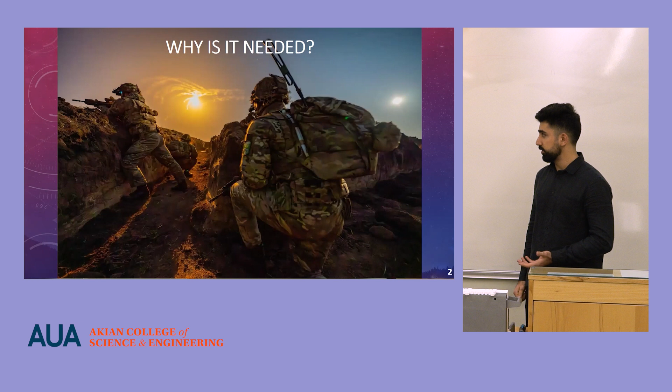There were various ways of magazine refilling, for example by hand, which takes lots of time and effort, and also it is not protected from dirt and dust—lots of things can get into it—and you have to carry the ammunition or have it stored somewhere.

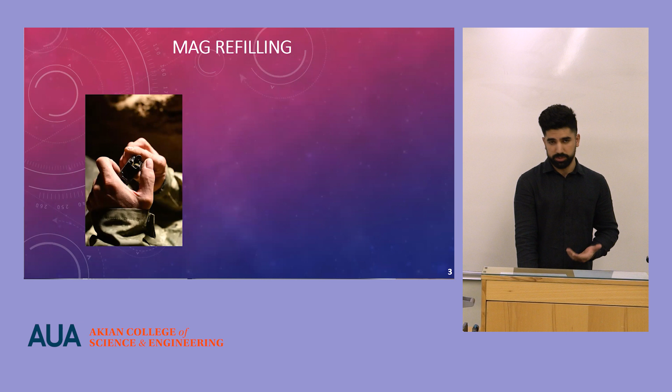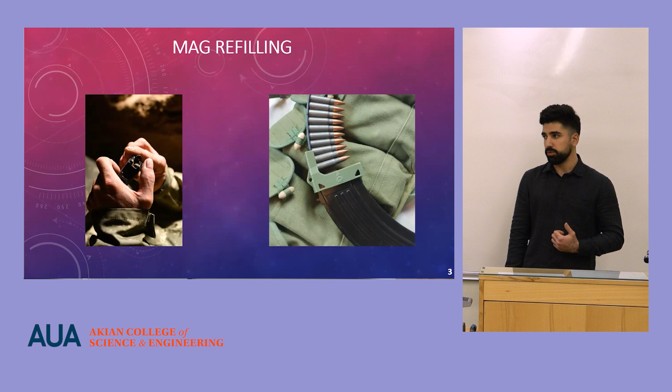The other one is using a clip which can be attached to the magazine. It only loads 10 rounds at a time and also is not protected from anything. Also, you have to carry the clips on you or have them stored somewhere else too.

Other loaders are like this one, which can only load one bullet at a time, also with no bullet carrying or concealment. And this one, in which you have to line up all the bullets in a specific way and then push them into the magazine.

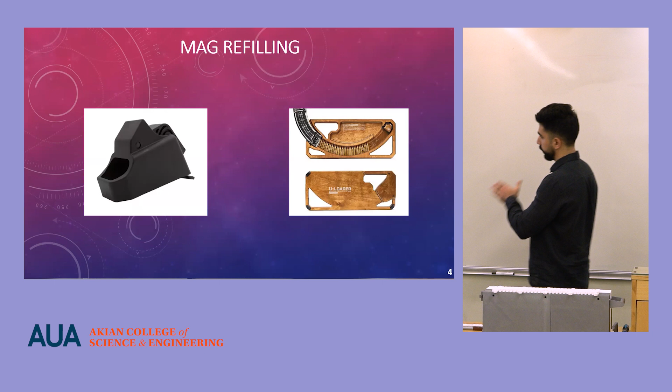In this case, the bullets can be put in any direction that you want, and by turning the handle they will be fed into the magazine, but only one bullet at a time.

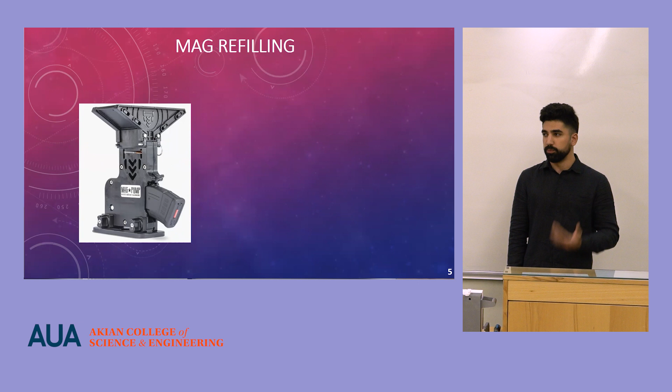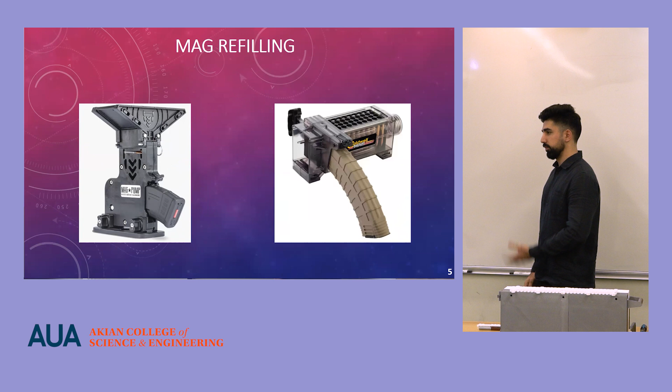The other one feeds 5 bullets into the magazine per push, but you have to really count it to not miscalculate. Also, it's not protected from dirt, dust, grease, water, and everything else.

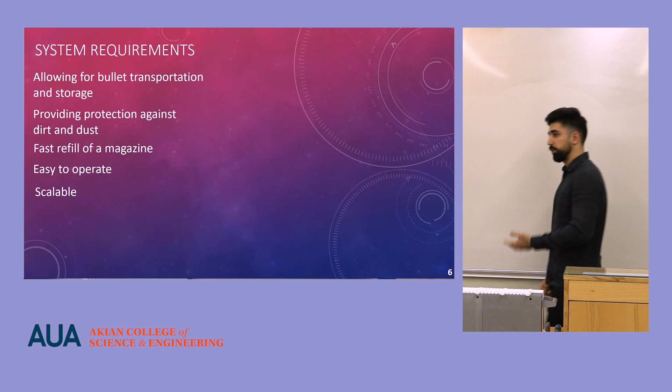That's why I came up with some system requirements for the system I have built: allowing for bullet transportation and storage, providing protection against dirt and dust, fast refill of a magazine, ease of operation so soldiers do not have to undergo heavy training to use the equipment, and scalability of the whole project.

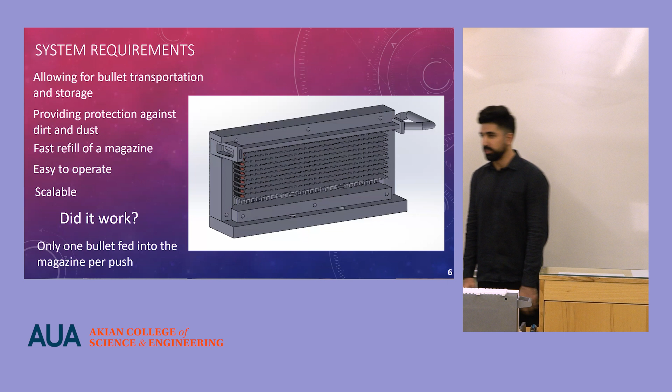This is iteration 1, the one you can see here. Did it work? Only one bullet fed into the magazine per push, but that's not how it ends. Not so fast, because we've come a really long way, and let's talk about it.

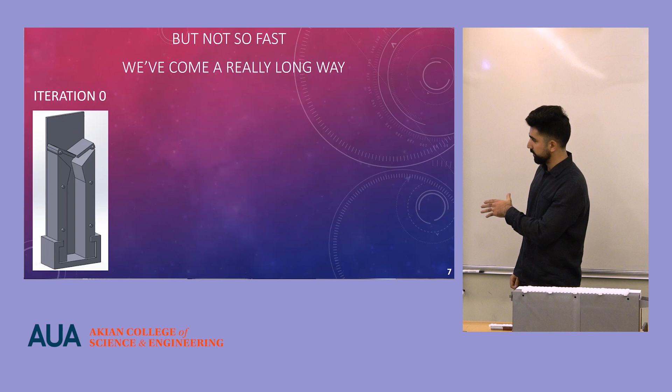There was an iteration 0, which was the initial idea from my thinking, from my drawings. I came up with this one, but there were various reasons why we didn't want to implement it, so I came up with iteration 1 that I've shown. And now we've got iteration 2, which is this one, and I will show it later.

Building the system: first of all, I did the sketches on paper, then in SolidWorks. After that, I created the assembly in SolidWorks, then I printed the parts using the 3D printers of our lab.

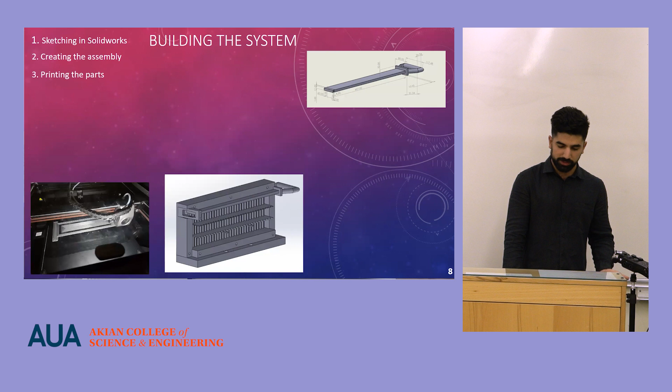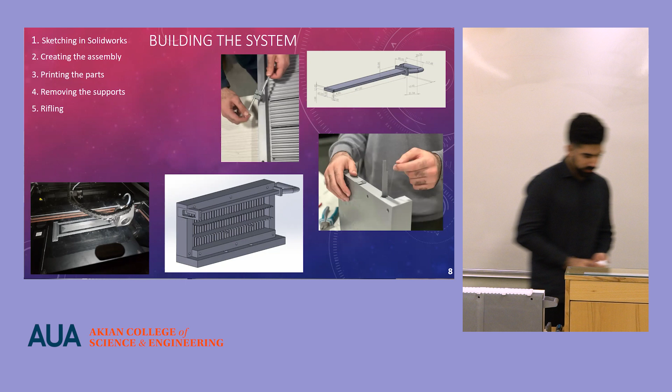I removed the supports and did the drilling so that two parts could be connected to each other using the M10 hexagonal bolts you can see here. After that, I did the physical assembly and some testing, which I'll show later on.

Let me tell you what parts of the system I have. Here you can see the two walls that basically enclose the system. All of the working smaller parts move inside them. You can see the spring tubes written in red here.

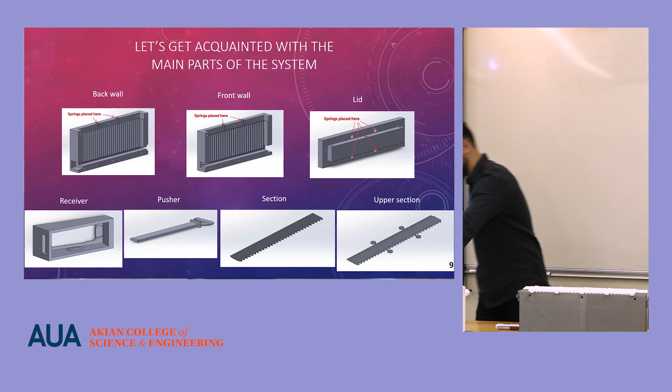Also there is the lid—this part. It encloses the whole system, protects it from dirt, dust, and grease, and also provides a surface for the springs to operate. The receiver, this part, is where you connect the assault rifle magazine.

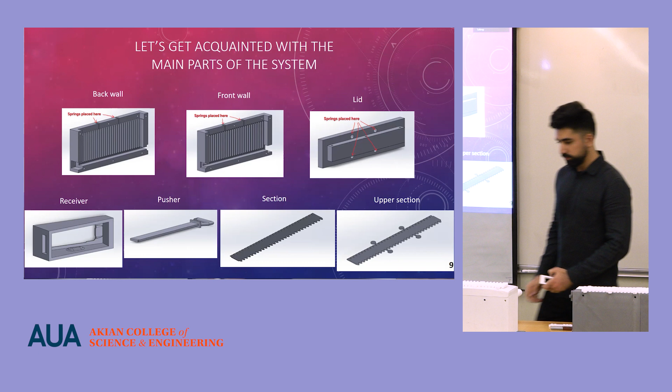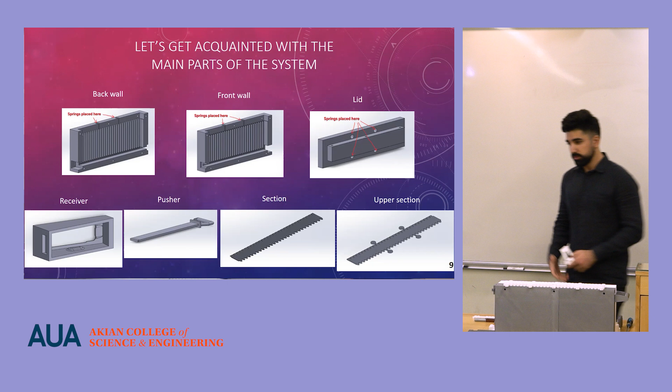The pusher, this part, pushes the bullets into the magazine and extracts a section when pulled back. The section is this part, which is put between each row of bullets, to separate the rows from each other so they don't get mixed up. The upper section, this one, is the last section you put into the system.

The springs push on these round parts that you can see, keeping the bullets at the level needed for the whole system to operate.

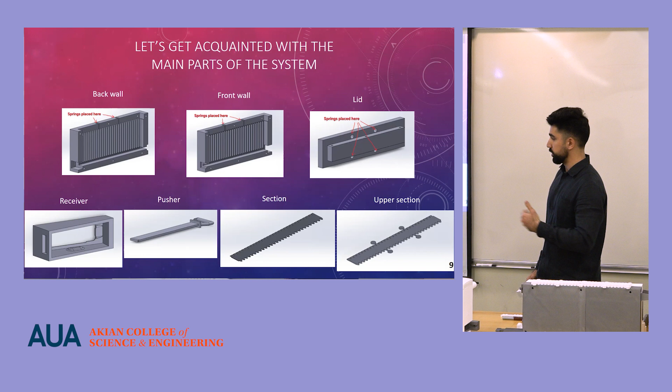Let's talk about some constraints and issues that occurred. For example, the calculated and ordered springs were not the same. I did lots of calculations on the inner and outer diameter of the springs, the thickness the wire should have, working and passive coils, etc. I ordered the springs, but they were 1 millimeter bigger in radius, which changes a lot, so they could not exert as much force as needed.

Also, the offsets weren't enough because I gave 0.15 to 0.2 millimeter offset for parts so they do not get stuck, but because it was 3D printed, there were some issues connected with it.

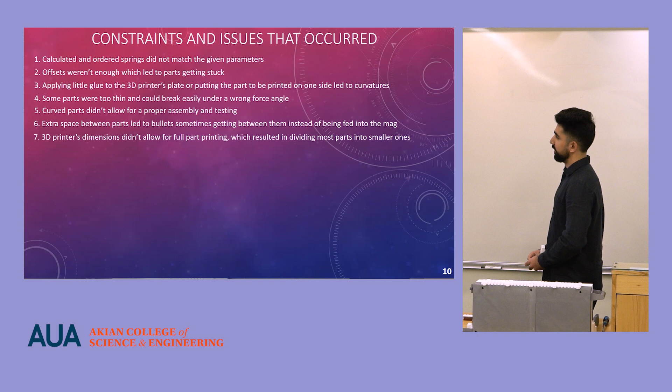There is also the art of 3D printing, which I had not mastered at the time. So applying little glue to the 3D printer's build plate, or putting something on its bigger surface, would result in the part being bent, curved, or warped, which also had its effect.

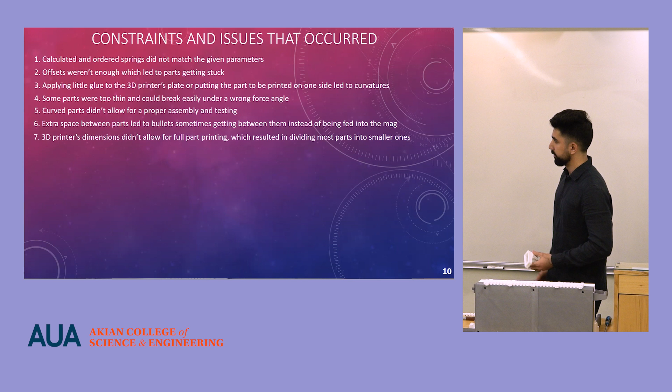Some parts were too thin and could easily break if a wrong force angle was applied to them. Also, curved parts didn't allow for proper assembly and testing. Extra space, which at the time was between parts, did not allow for the bullets to go into the magazine, but rather they went into those openings.

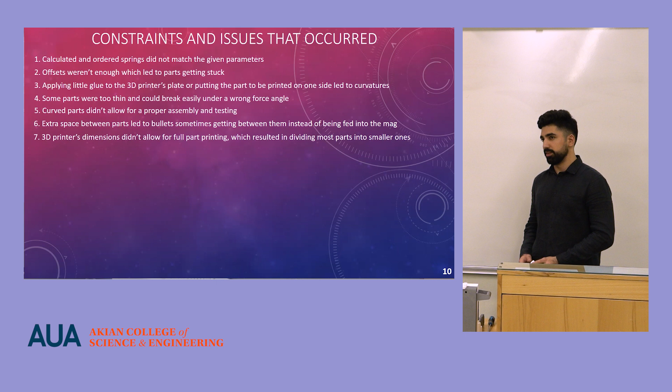And the 3D printer's dimensions didn't allow for full part printing, as you can see here. Each part is divided into 2-3 parts so that they were printable. But whenever I printed wrong parts, or when they didn't have the dimensions I need, I didn't give up on them, because these three tools can really work magic.

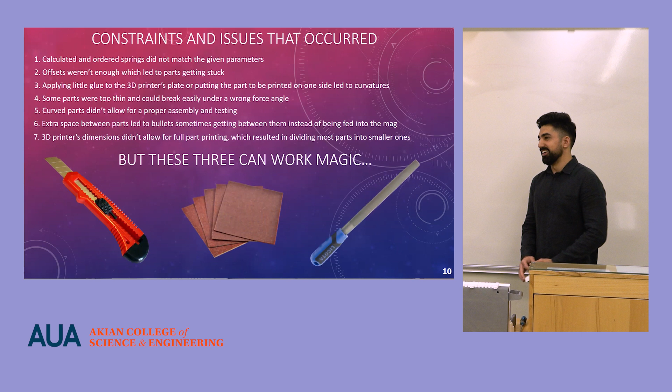I'm pretty sure you are well acquainted with these tools. They helped me out a lot. Sometimes there were cases when I needed tools that did not exist, and that's when I created my own.

For example, the support removal stick. It's a simple hook like this, which helped me get into those little tight spaces and remove all the supports that were not needed.

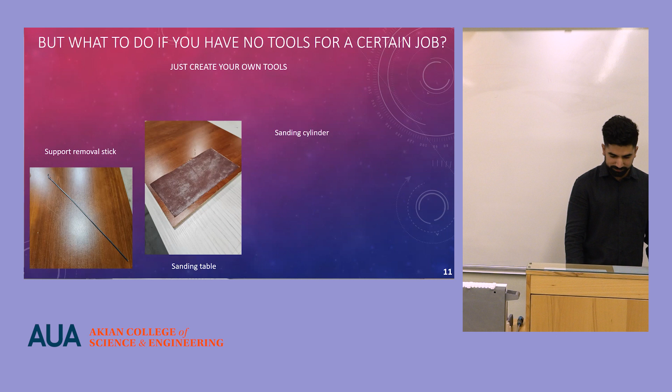The sanding table, as I called it, which is sanding paper attached to a board, helped me do the job easily. And the sanding cylinder - I had spring tubes which were already there but of a wrong size, so I attached sanding paper to this tube, and it allowed me to enlarge the tubes so the springs would fit.

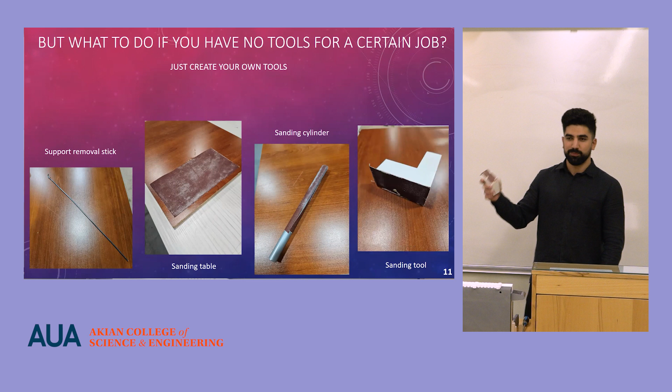And the sanding tool, as I call it, also helped me out a lot for support removal and other parts editing. Now let's talk about iteration 2.

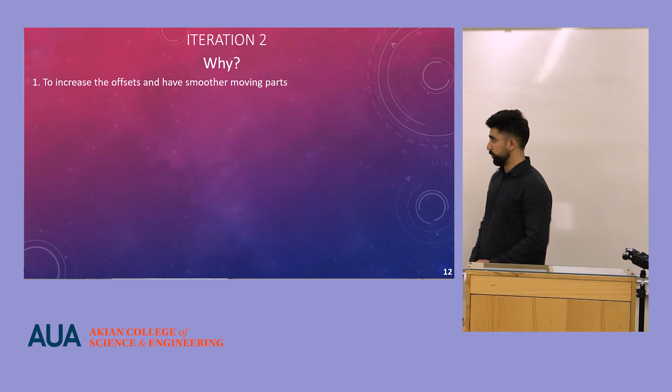First of all, why did I do iteration 2? To increase the offsets and have smoother moving parts, to adjust the spring tubes to the size of the ordered springs, and to help the upper section withstand the weight of 300 bullets in 10 sections.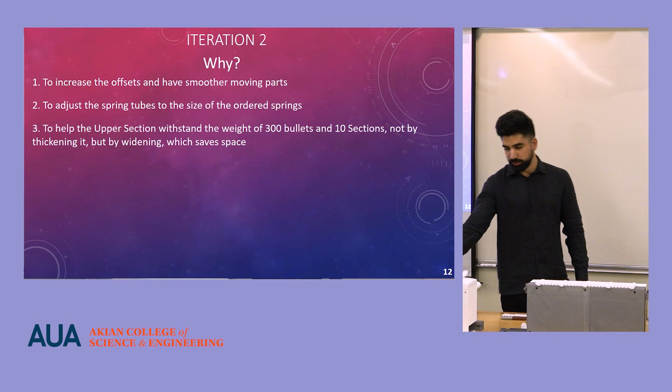This whole system can store and load 300 bullets. The upper section had to withstand that weight, and we were not sure if it would. After some tests, some of these round parts broke, and I understood that it should not be thickened but rather widened to be able to withstand that force.

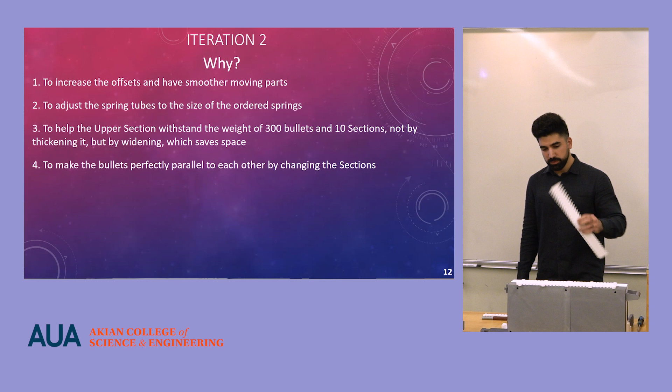To make the bullets perfectly parallel to each other - because if you use sections like this, each row of bullets will have an 8.4 degree angle with the previous row, and that's not what we want, because the 10th section would be nearly perpendicular to the first one - I created this one, which already has a shape that will help the bullets fit perfectly.

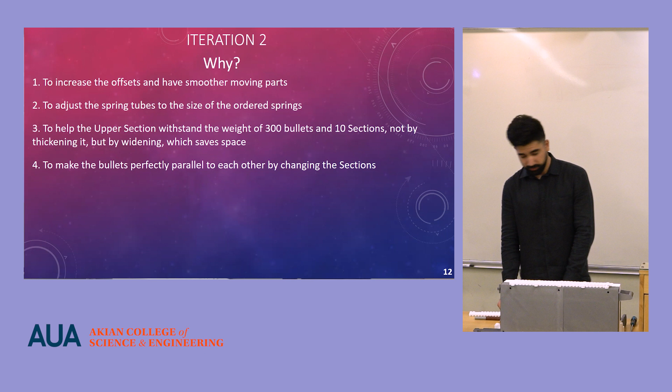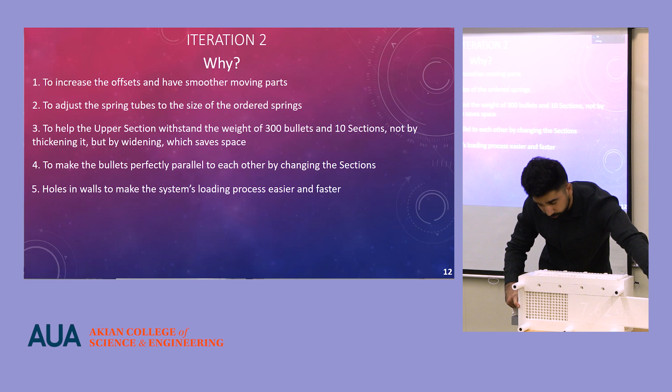The whole aim was to make the system's loading process easier and faster. Let me show you here. So this is the wall, and these are the holes, which allow for easier bullet loading into the system.

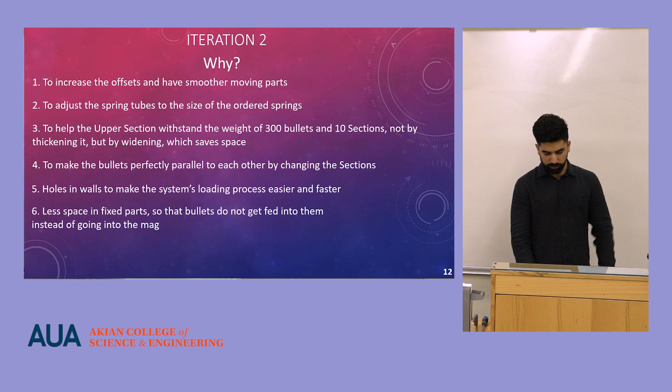And less space in fixed parts, so that the bullets will actually be fed into the magazine, not into the wrong parts of the system. Also, here I mastered the art of 3D printing, and I was able to print the parts in a way that they were nearly not curved and warped.

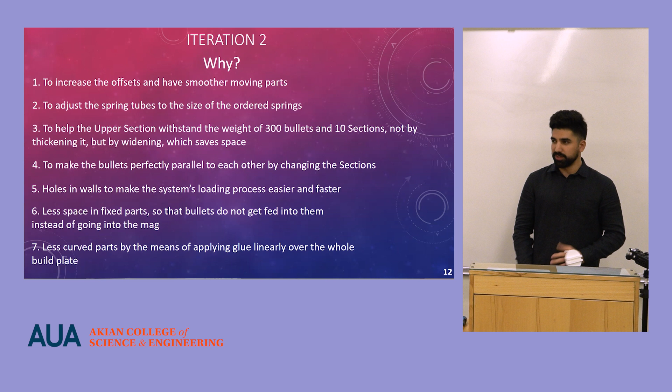There were some limitations though. So which parts have changed in shape? We got acquainted with the parts. Now let's see that the back wall has turned into two parts.

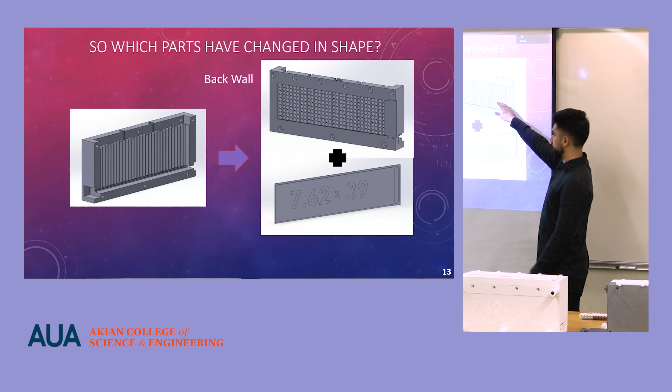This part allows for easier bullet loading into it, and this cover allows for protection against dirt, dust, grease and water. It shows the caliber that should be fed into the system so there is no confusion.

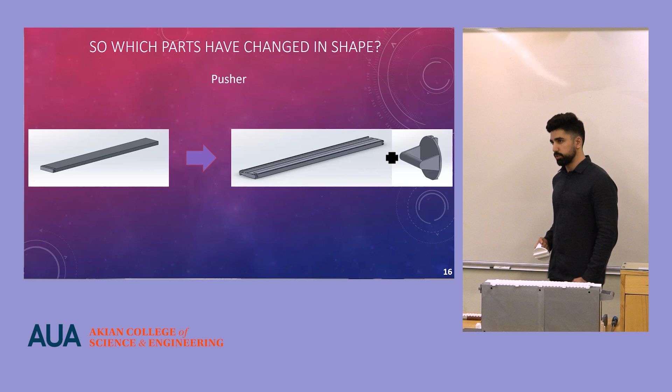As I've already mentioned, the middle section has changed, the upper section has changed, and the pusher has changed. Now it has a handle which makes loading, extraction of sections, and pushing the bullets into the magazine much easier and more convenient.

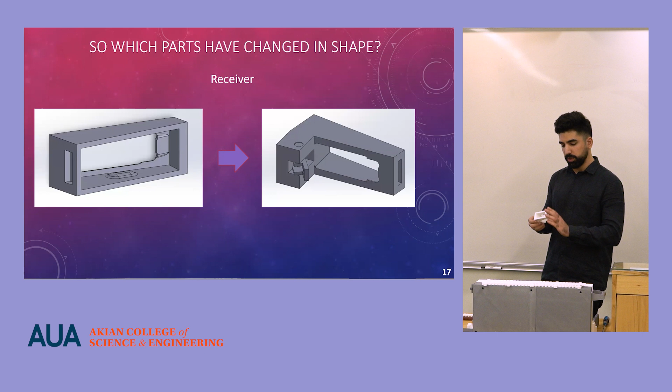Also, the receiver is now identical to that of the assault rifles, so soldiers do not have to undergo any extra training. It works like this with the button and the spring, so they can simply take the magazine, connect it, and it sticks like that, and they take it out the same way as for the assault rifles.

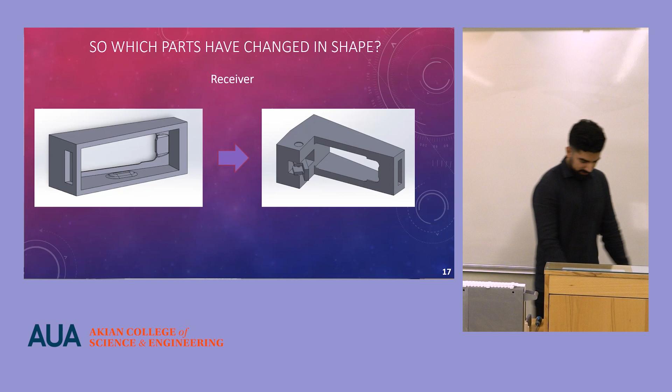Okay, so this is the full assembly of my second iteration. And the question is, does it work now? Yes, it does. It can load up to 10 bullets into the mag per each push.

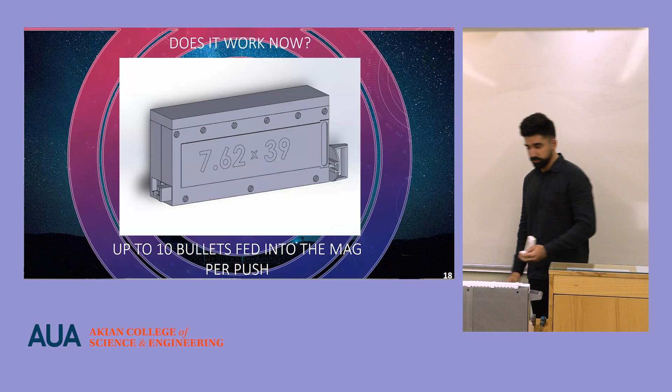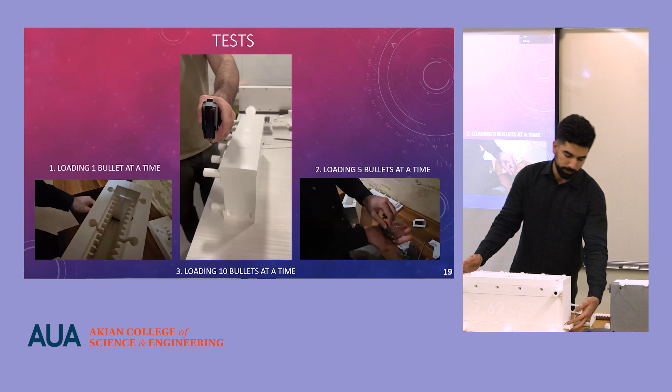I have conducted some tests, let's talk about them. We had a concern that the pusher would not be able to exert enough force to push the last bullet into the magazine, because the more bullets you put in, the more force the spring has counteracting the pusher. So I tried feeding one bullet at a time into the magazine, and it worked just fine. There were no errors at all.

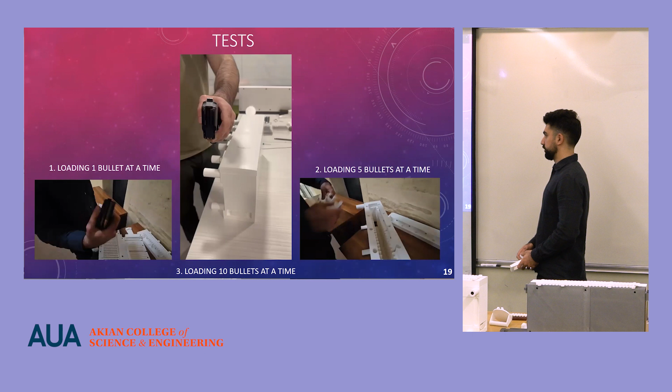The other test, shown on the right part, is loading 5 bullets at a time. I wanted to understand: it's no problem to load 1 bullet at a time, but can we do it with 5 bullets? No problem occurred there either.

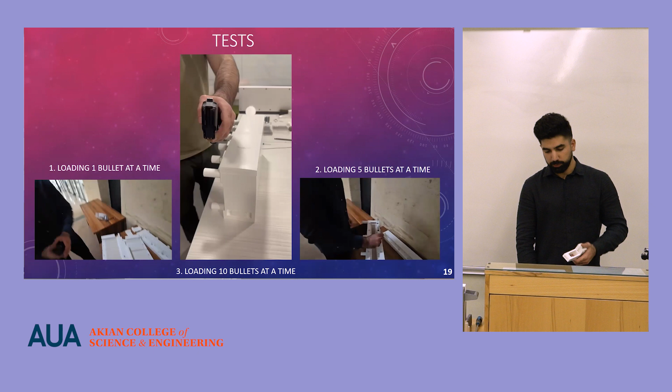Then in the middle part, you can see the video of me trying to load 10 bullets at a time. This is the iteration 2 video. Here I put in the magazine, align it, and no problems occurred with loading either.

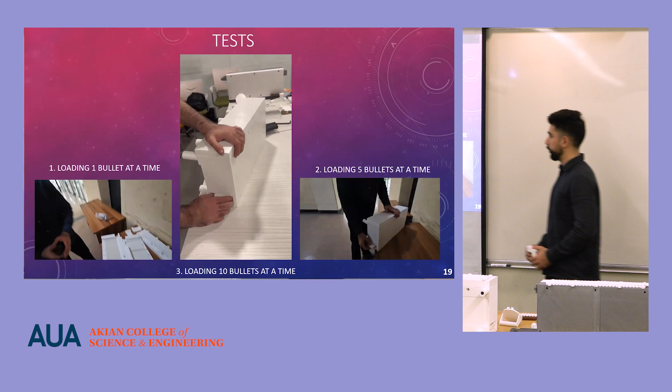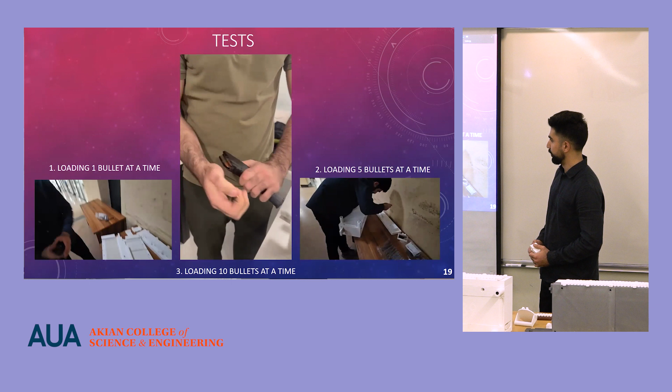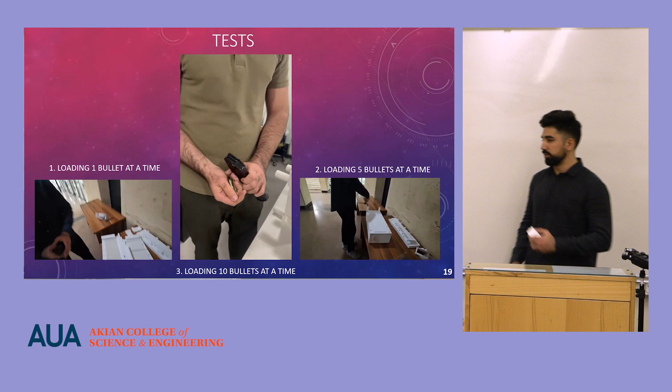I will now show how many bullets got loaded into the system when I take out the magazine. So it loaded 1, 2, 3, 4, 5, 6, 7, 8, 9, and 10 bullets, perfectly fit into the magazine. They were not misaligned, not in the wrong direction, everything was just fine.

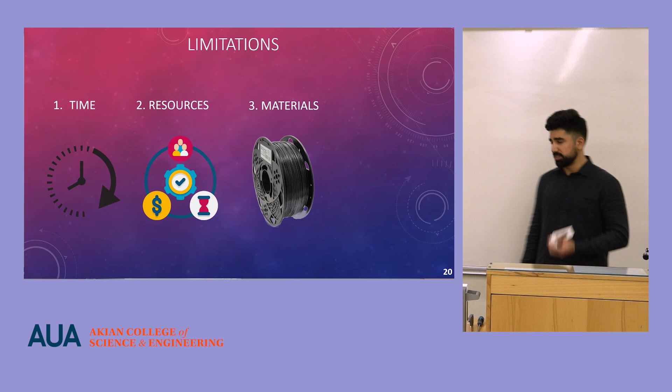Let's now talk about the limitations. Of course, the limitation of time — I was given 1 year and had to do everything I could in that time. The resources, because if I had more resources I could buy more springs, and if those didn't work out I could try other ones and experiment, which I couldn't do at the moment. Materials — mostly everything here is 3D printed using generic PLA, which is a limitation itself, because the hardness and stiffness of the parts was not industrial or military grade.

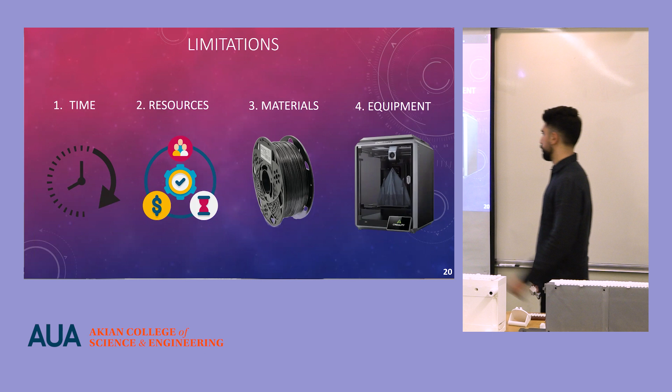And of course the equipment — the 3D printers did not allow for full part printing, and that resulted in some issues, which I solved as much as I could.

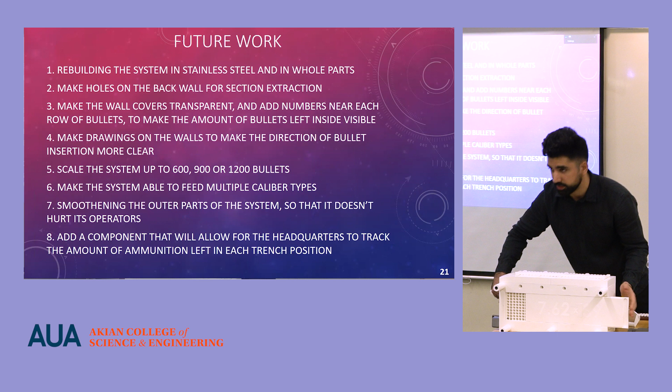Let's talk about future work. The system can be rebuilt from stainless steel so it is not subject to corrosion, and all parts can work smoother and in full pieces, so each part does not have to be divided into smaller ones. You saw the holes which made loading bullets easier, but I also mentioned that sections are going to be put after each row of bullets.

On the back part, there is no opening, so an opening can be made for those to be inserted too. The wall covers can be made transparent, and the amount of bullets left can be displayed on the wall, so the user knows exactly how many bullets remain in the system.

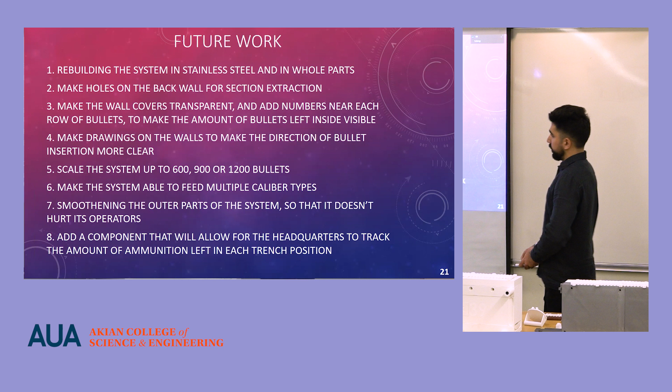Drawings on the walls can be added so people don't confuse directions and put bullets in the wrong way — it should be put like this, I don't want anyone putting it like this — so that could be changed.

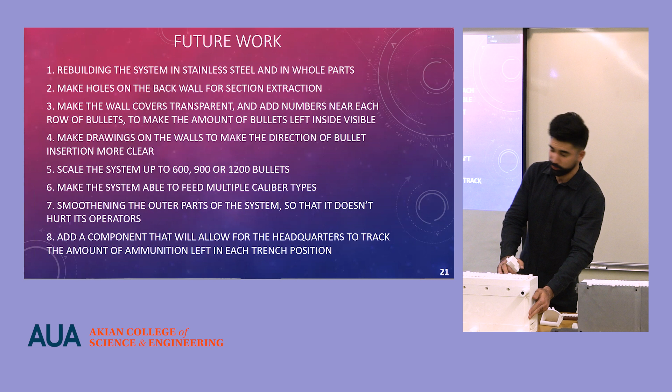Scaling the system: right now it can hold up to 300 bullets, no problem. We can scale it up to 600, 900, and even 1200. I think 1500 would be too much, even for the tall guys — I don't think that is really military grade.

The system can be able to feed multiple caliber types. This one is for 7.62x39. It has the biggest openings, and we can make it for 5.45x39, 5.56x45 without any problems. The only thing that should be changed are the middle section, upper section, and the receiver. All the big main working parts can stay the same.

Also, I would really like to smoothen out these edges, because while working with it I had lots of cuts and bruises, and we do not want our soldiers to have those, especially during a battle.

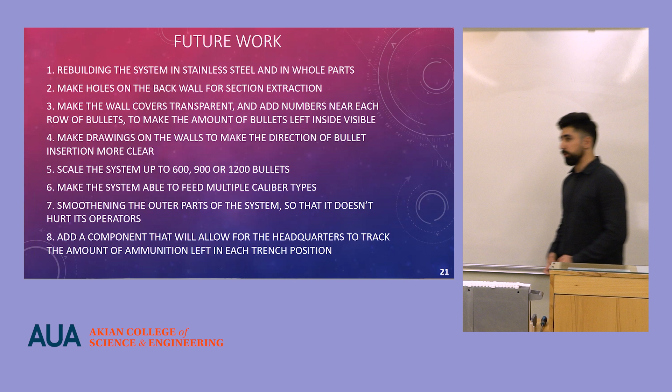Also, a component can be added to the system which will allow headquarters to track the amount of ammunition left in it, so that when a middle section goes up, they receive a signal that this position does not have 300 bullets, but rather 270 or 240, so they can refill the position with new ammunition at the correct time.

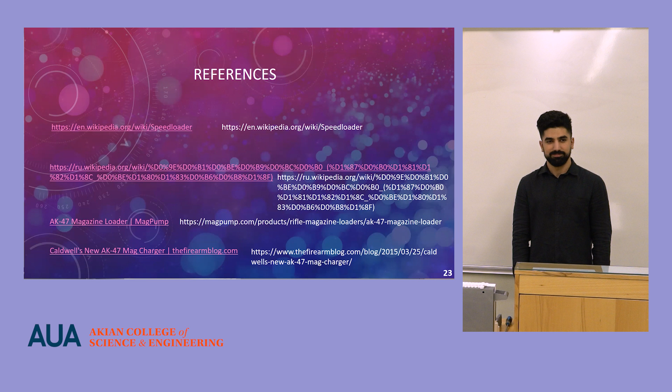Have you calculated the weight of your system when fully loaded? Yes, without these parts, the bolts, it's 11 kilograms. With those, it's 12 kilograms. But the system is stationary.

It should be put into the trench itself and not moved all the time. So people get to it, get closer to it, fill their system, fill their magazine, and go back to their position. So it does not have to be carried all the time. Well, in general, you have to have an operator for that one, but still, it's a very valid design.

How easy is it to operate when there is no light? Do you mean to load the magazine or to load the system? To load the magazines. There is no problem, because you simply put the magazine here, you pull the pusher and push it forward, and that's it. You do not have to see anything exactly, you can just feel this part. It feels like the place where you should insert the magazine, you fill it, and you take it out.

And is there any chance that the user will not feel when the magazine is fully refilled? No, because you just need the 3 pushes and that's done.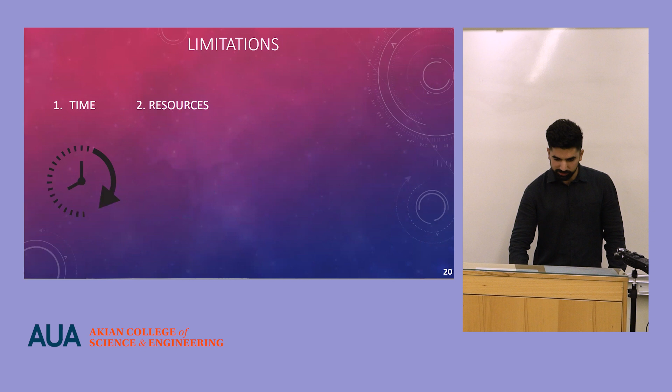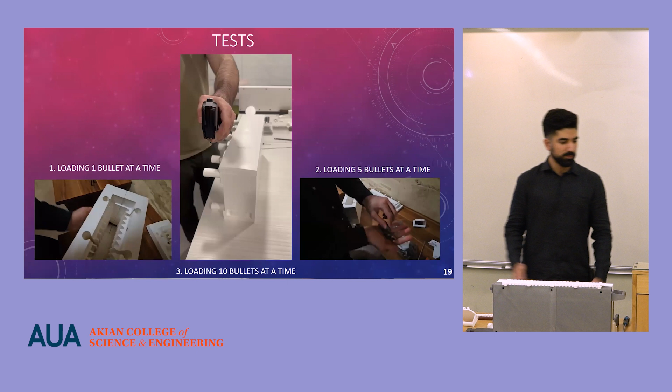Last 10? I've done tests, let me show you. When I was loading 1 bullet at a time, I loaded 30 bullets into the system, one at a time, but there were no mistakes, no misalignments, no errors. The bullets fit perfectly, all 30 of them, and it was perfectly usable.

Haven't you done 3 groups of 10? I have, I don't have the video here, but it works the same, no misalignments. Even more, sometimes when you load by hand, you should bump it so the bullets go down. In this case, you don't have to do it at all. They are already in the correct position.

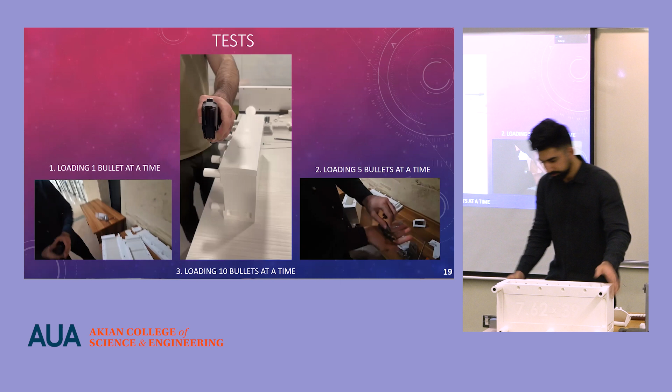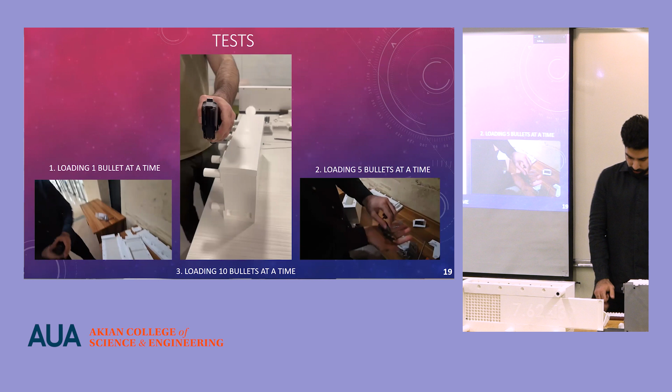How do you refill the system? Can you show us? I can show you loading the system. You take out this cover, open this part as much as needed, take the door off, and put the bullets in from here. After you put 1 row of bullets, you put a section like this from above. Then you put bullets in the second row. It's visible how many bullets there are, so one cannot miss. And like that to the top, then you put the upper section so the springs can work.

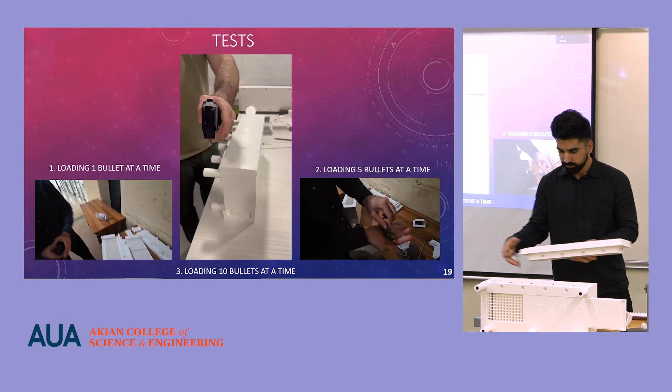In my case, I use 2 springs for each tube. You put one spring at the top, one spring connector in my case, and another spring, and so on. Then you take this, close the system, and fix it with bolts. These are M10 hexagonal bolts. You close the system and it's ready for use. As simple as that.

Essentially it's a one-time use during the battle, because to refill you have to be in a perfect state of mind. No one should be shooting at you, etc. But still, very, very impressive design.

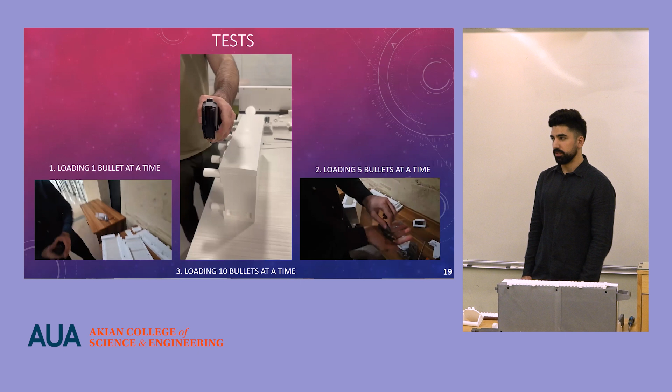Thank you. Did you discuss all of this with military experts? I have. While studying in Vazgen Sargsyan Military Academy, I had a second colonel I told about this. He guided me a bit, said these problems can occur, you should take this into account. And I did. When I was talking to other officers, they were also impressed.

And they were saying this can really make a difference during battle. Which kind of battle and what kind of troops? Mostly during trench warfare, because during trench warfare you don't leave your position, you don't move a lot, you can go 5 meters there, 5 meters to the left, but mostly you stay in the same position. Mostly by infantry protecting the trenches in modern times, it is mainly being used by them, will be.

But compared to 20 empty magazines, which you can have extra at position, how do you compare the system to this, cost-wise? 20 extra magazines, which normally you would load if you have 600 capacity, with the cost of the system you've presented - have you done such considerations?

I have not, but if we're talking about this one printed with a 3D printer, it's even cheaper. It's much cheaper because the army grade magazine, this one for AK-103, not AKM, costs 25 on the market. It's 20k drams for the military. So if we have 300 bullets here, then we need 10 magazines, and that will be 200,000 drams, and this whole system doesn't cost that much. Think about the cost of producing the magazine.

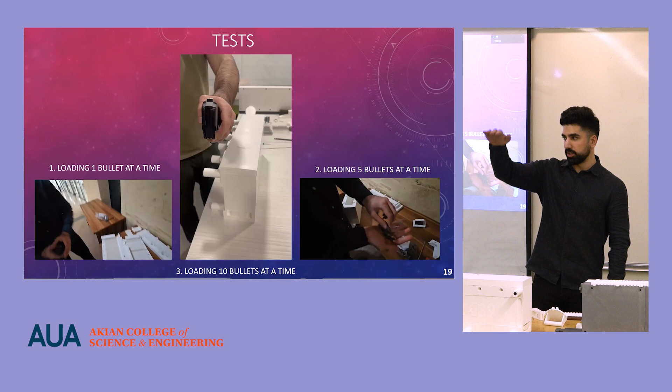So it's going to be put on the ground, and this isn't easy to operate on the ground. So if it's 600, 900, it will be much easier to operate, and it will be able to fill multiple magazines.

If during the filling of individual rounds, you're assuming there's a protocol, and as Alec said, it's done in a perfect state of mind and no bullet is missed. But let's say one bullet is missed - have you taken into account that there's just an empty space and you accidentally operate it? Does that result in a full decommissioning of the device? Not at all, not at all.

I wouldn't say it's perfect, because when pushing you can feel that one bullet had to go like this, it goes like this for a second. But you push it, you look into the magazine, it's perfectly fine, nothing happens. I have tested those malfunctions - one bullet, then one space, one bullet, then one space - it was okay.

I'm just trying to think of in an actual situation, would you want to carry this with you? Or would you want to have one guy in charge of this? Or is this being done in a truck with one soldier filling these up really quick? Because if you're in a battle, you're nervous, you know how it is. You're really nervous, your thing doesn't work, then you push it too much, you push it too little, you say okay I have 5 in here, that's probably good enough. The next guy comes in and he doesn't know what to do. I'm not saying anything - this is one of these necessity is the mother of invention kind of projects.

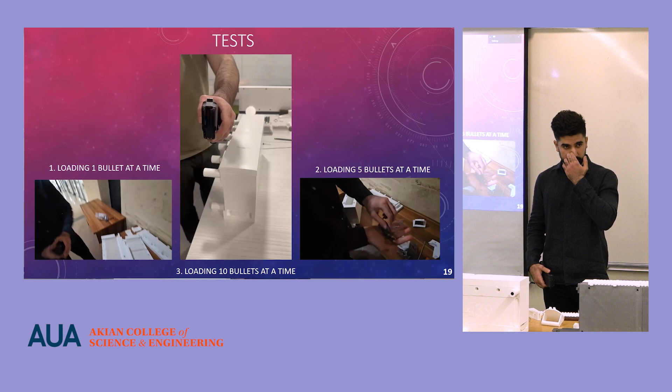It is heavy, but it's not going to be moved around frequently. It's going to be brought and put into the trench, and people are just going to come up, put the magazine in here, pull and push, and that's it. They do not have to carry it with them all the time. The loading of the whole system initially, before bringing it into the trench, can be done in what we call Hasa Bahest - they do the loading there, then bring it into the trench. I think the mechanism is pretty simple and no errors can occur with loading. I don't think someone will not understand how to do it or how much to push it - you just push until there's no more space to go. It's that easy, I don't think any problems should occur with that, really.

If you put this at the bottom of the trench, it's really dirty, you know? Yeah, it really is. But as I've said, we can scale it up because this one is really low - we're not going to operate it like this. We'll put it at a higher level, and it is also protected from dirt, dust, and grease. So no problems should really occur in that case either.

I'm going to paint it green. No.

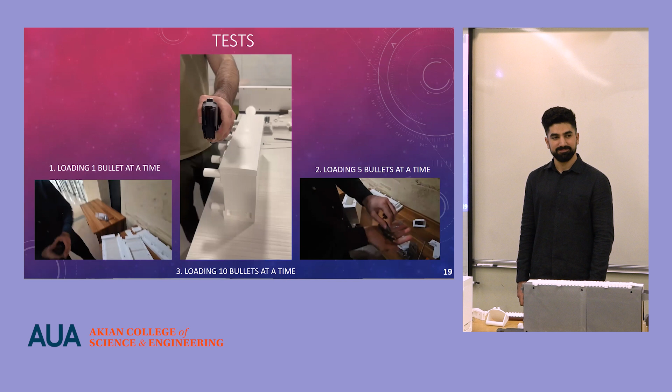Usage-wise, there are some questions, but as a mechanical design, as a mechanical engineer, it worked brilliantly. Thank you. I think everyone is invited to collaborate and make this happen.

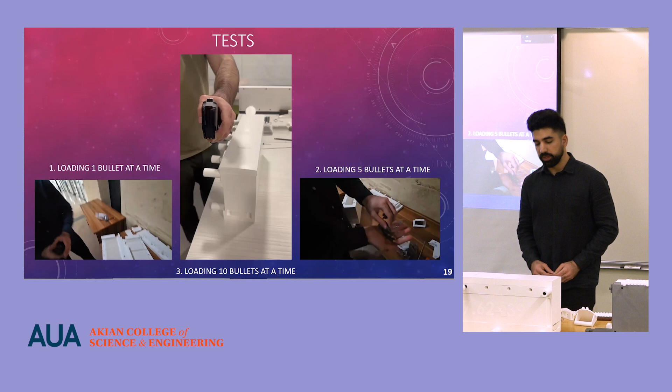I would be glad if I could continue working on this project. What's the weight of the unit loaded - to load the magazine or the system, the whole unit when it's loaded, how much is the weight? Without the bullets it will be 11 kilograms, with it's 12 kilograms for now, with the bullets, yes.

So one person can easily carry it. I mean, you should not really carry it, but one person can, of course.